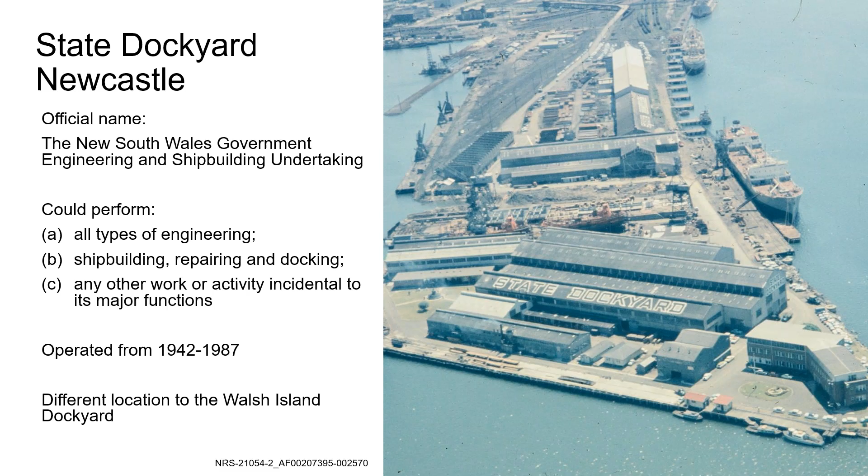As mentioned, the State Dockyard commenced operation in 1942 in the middle of World War II. Britain at that time was heavily reliant on shipping to provide supplies and men. But as the Battle of the Atlantic progressed, German U-boats inflicted heavy losses on British ships. And in 1940, Winston Churchill sent out a call across the seas for ships, more ships, and many more ships.

As a result, William McKell, who was the New South Wales opposition leader at that time, had started pushing for the reopening of a New South Wales dockyard. Upon his election as Premier in May 1941, he approached the Australian Shipbuilding Board for the go-ahead, which was provisionally granted. So on the 25th of August 1941, Mr. David Lyon McClarty was appointed State Director of Engineering and Shipbuilding. He had a strong background in shipbuilding, having worked at privately owned shipyards in both Scotland and Australia for many years, and he reported directly to the Minister for Public Works.

McClarty's first job was to re-establish a dockyard as quickly as possible, and there were thoughts of resurrecting the former Walsh Island dockyard. However, an assessment of the site was disappointing. Much of the equipment and plant had been sold off when it closed in 1933, and the site was a scene of desolation. Additionally, access to the island required constant dredging due to silt build-up in the Newcastle harbour.

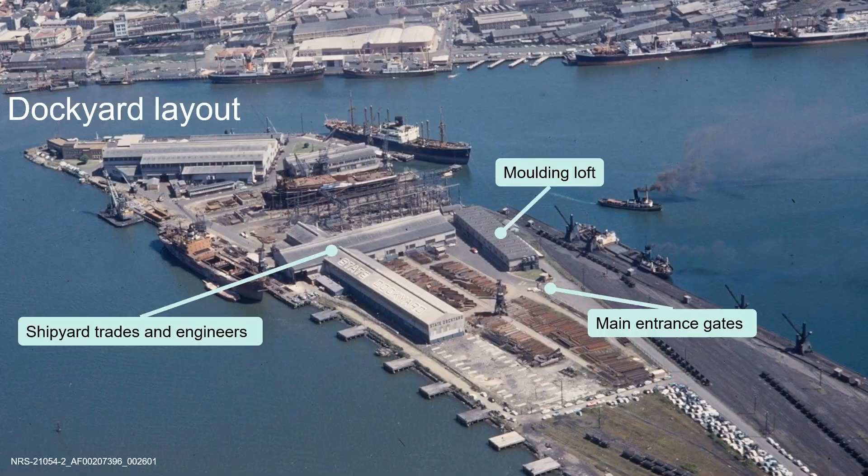At the end of the peninsula were more workshops, and the larger building with State Dockyard written on the roof comprised the blacksmith shop, the machine shop, boiler shop, electrician shop, repair shop, and a garage and plant maintenance section. The smaller buildings to the foreground housed the joiner's shop and the pattern shop. And to the bottom right of the picture is the two-story admin building where management and office-based staff were located.

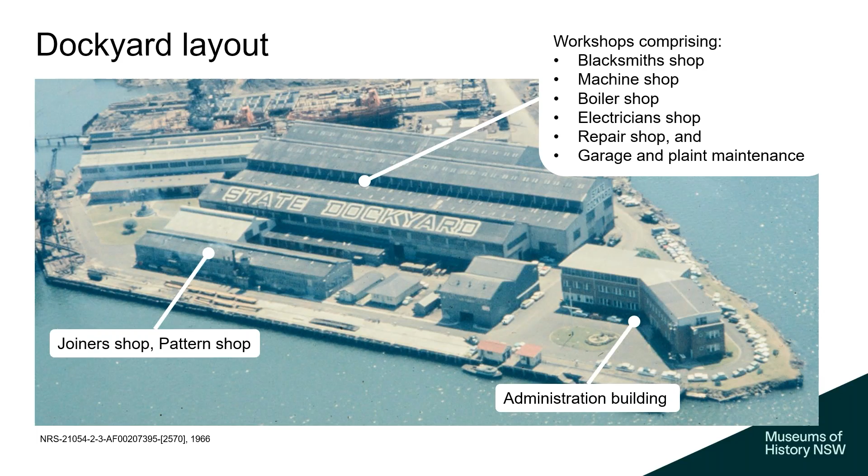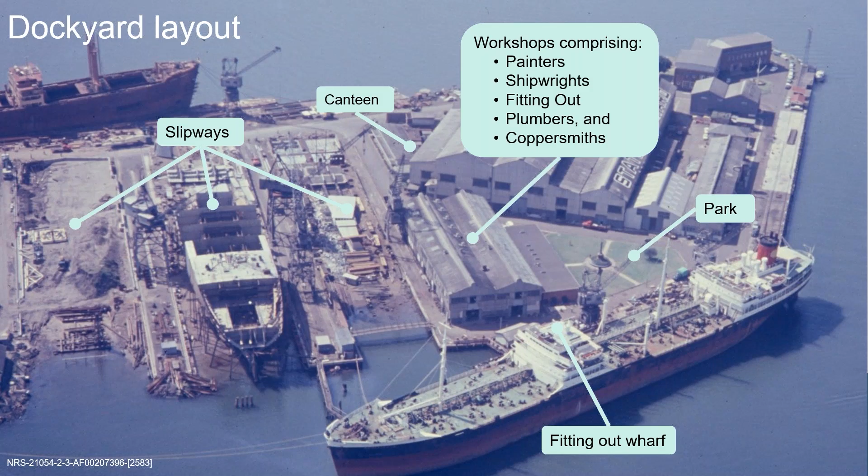And it must have been a momentous task to prepare and serve all those meals, but it was essential for the men to keep their energy up, because shipbuilding involved a lot of manual labour, and it wasn't as though they could just pop down to the local Macca's for lunch.

So another key part of the dockyard was the floating dock, and this was essential for the docking and repairing of vessels. As mentioned, the floating dock came from the former Walsh Island dockyard. There it had operated in 2 separate sections, but for the new dockyard, the 2 sections were joined together to create a floating dock with a lifting capacity of 15,000 tonnes. And this meant it could accommodate a lot of the larger vessels.

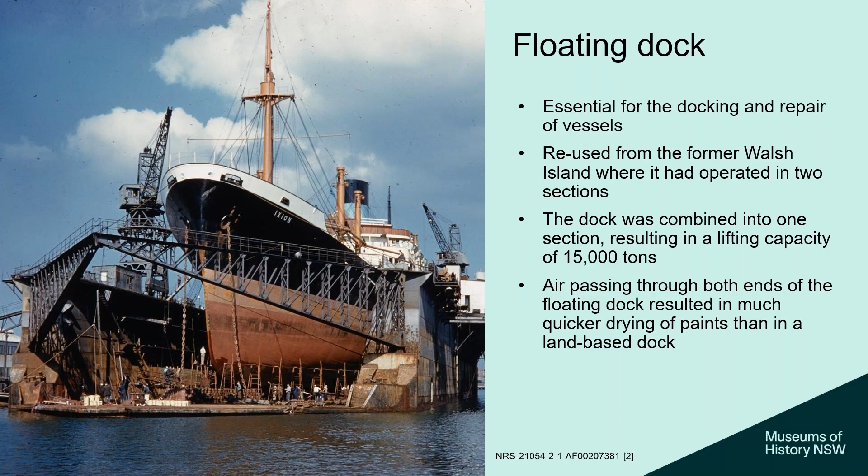So a few months later, in October 1942, the Australian Shipbuilding Board placed orders on behalf of the Small Craft Construction Directorate for 20 more vessels. These were 120-foot twin screw cargo vessels to be built on a production line basis. Formal approval for the dockyard was not given by the Commonwealth Government until January 1943, but by then the dockyard's operations were well underway. By the end of the war, after just 4 years of operation, 21 vessels had been constructed for the Army and Navy.

6 sets of triple expansion engines were completed, and 600 vessels had been docked and or repaired, and many of these had been heavily damaged by enemy action or collision. And great reviews were received about the quality of the work at the dockyard.

In a 1944 letter from Charles Brown, who was from the United States War Shipping Administration, he said that during the past few months, several US warshipping admin vessels have been dry docked and received major repairs, and the facilities at Newcastle have been of incalculable benefit in putting our ships back into service for the war effort with minimum delay. And in another letter from Captain Rabone of the SS Admiral Chase, he said, 'It was the best work I have seen in 5 years. The docking was done expeditiously and efficiently.'

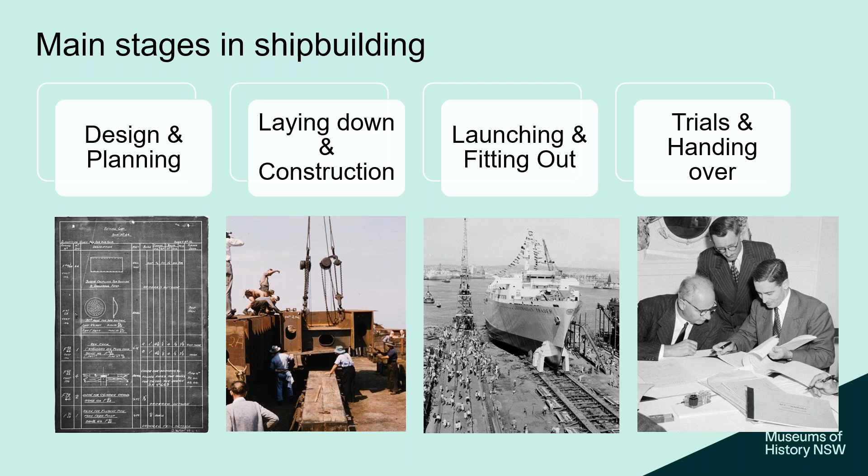As a first step, plans and drawings of the vessel were prepared. These plans would include the arrangement of the vessel, including cargo, fuel and ballast, and crew and passenger accommodation, accompanied by detailed specifications of the hull and machinery. In some instances, such as with Army and Navy vessels, plans were already available based on pre-existing templates.

Once the plans had been prepared, engineers at the dockyard then drew detailed plans for use by the yard's builders and to construct detailed production schedules. We do hold original plans and specifications for many of the ships constructed by the dockyard. However, as the plans can be quite large and many have been stored folded and rolled, a conservation assessment may be required before they can be issued in the reading room. The National Archives of Australia may hold plans for any naval or army vessels constructed by the dockyard.

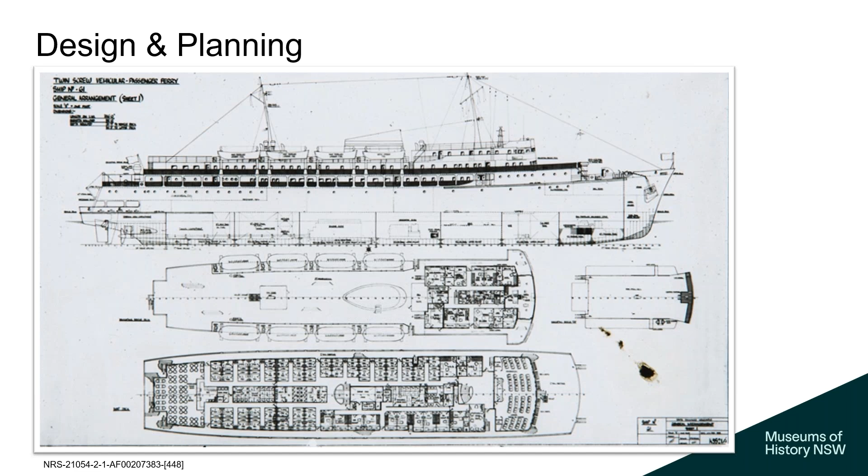Earlier I mentioned the moulding loft that was in the building just to the right of the main entrance gates. The moulding loft played a very important role in the construction of the ship. It took up the whole top floor of the building and was a big open space. In this area, the ship's design was transferred in full scale onto the lofting floor by loftsmen, and from these drawings full-sized wooden molds and templates were made, which served as guides for cutting and shaping the steel or wooden parts for the ship.

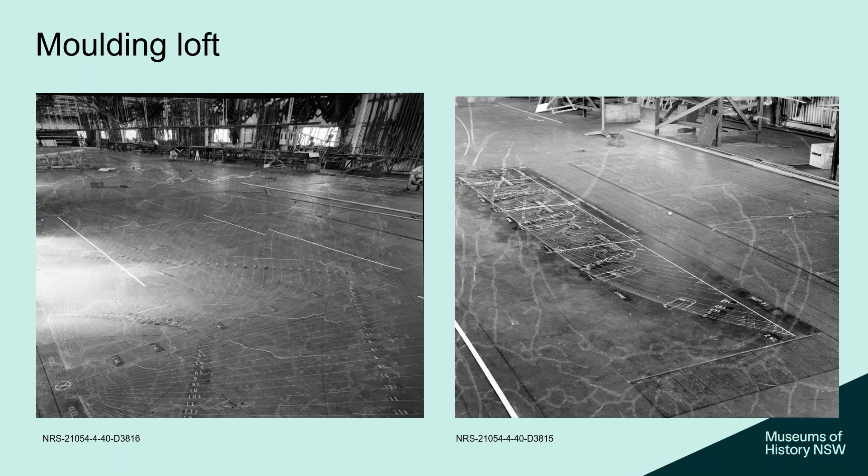The next key stage was the laying down, when the first section of keel was laid on the building blocks. This step signified the official start of the construction process, even though fabrication of some parts may have begun earlier. Here we see the keel of the Princess of Tasmania being laid down on the 15th of November 1957, and everyone looks pretty excited to get that first bit of keel in position.

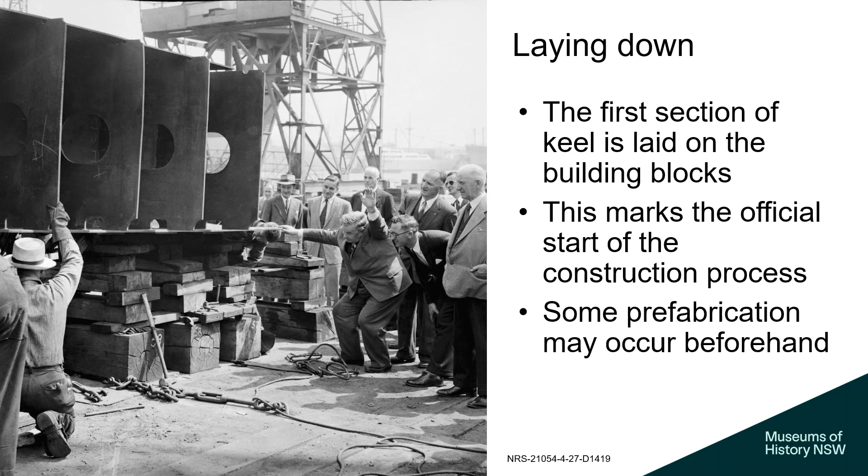Once the keel was laid, construction would progress section by section, with various parts of the vessel constructed either on site in the workshops or in some cases sourced externally. It could take months or years for a vessel to be completed, especially if waiting on parts from external suppliers, and sometimes industrial action did delay the process. But what amazes me most is the immense proportions of these components. Each had to be lifted, maneuvered into position, and then riveted into place.

On the left here we see a workman standing beside the bulkhead of the Koojarra, ship number 59, a passenger cargo ship built between 1954 and 1956 for the West Australian government. On the right we see the stern of the BP Enterprise, ship number 77, constructed for the BP Tanker Co. between 1967 and 1968. Some really massive structures here that absolutely dwarf the workman.

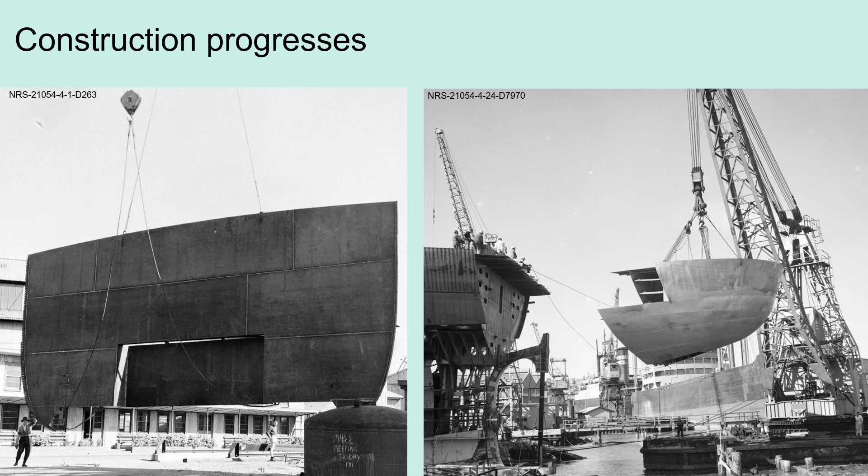Once the hull was completed and watertight, the next stage was the launch. The launch did not mean the ship was ready to sail away, but it was another significant moment in the construction of a ship - a culmination of everyone's hard work over months and years, and there was no greater satisfaction than watching a newly completed vessel sliding into the water.

In 1988, a researcher named Natalie Sanderson interviewed former dockyard employee Frank Neat for a history project. When asked what he enjoyed most about his 40 years at the dockyard, Frank said it was the launch of every ship. Here we can see the Australian Trader, ship number 79, being launched on the 17th of February 1969. The Australian Trader was a passenger and cargo ship built for the Commonwealth of Australia. It had taken 18 months from laying down to launch, so it must have been a big relief for everyone to see it go down the slipway. It was estimated that 1,500 people came to watch the launch on the day.

And you can see employees here in the photo on the rooftops and scaffolding, and there are many people streaming into the slipway to watch the event.

Launching a ship was not a simple process. The launch program involved many steps and checkpoints, both prior to the launch and on the day itself, to ensure that the launch went smoothly. Dockyard employees had to prepare the ship prior to the day, for example by oiling the slipway. And on the day of the launch, select employees would arrive early in the morning to prepare the vessel. One forgotten step could ruin the launch.

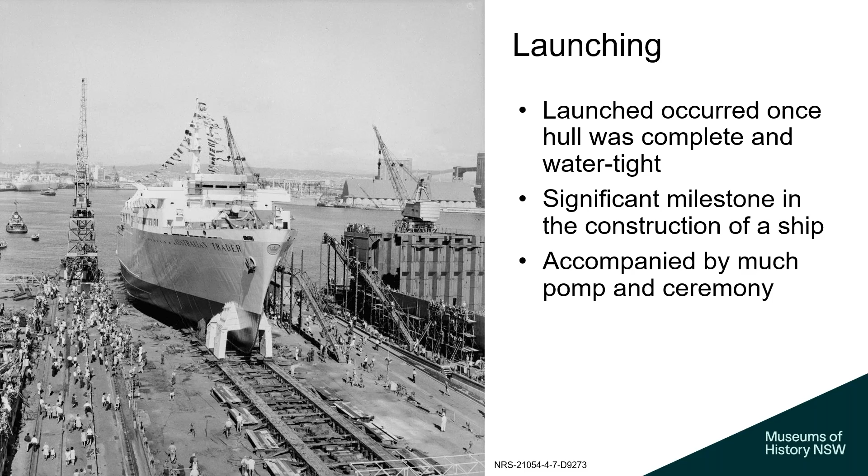Each launch was a big event with much fanfare. Key dignitaries and officials were invited, including relevant government ministers, the local mayor, and the ship's owners. A ship's sponsor was chosen, and most often this was the wife of the minister or another important guest. Dockyard employees, their families, and the local community were also welcome to attend, and the vessel would be decorated with bunting. A flower girl would be selected to present the sponsor with flowers, and the ship would be christened by smashing a specially designed champagne bottle against the hull of the ship. Invited guests would then attend a catered luncheon after the launch, and the sponsor would also receive a gift.

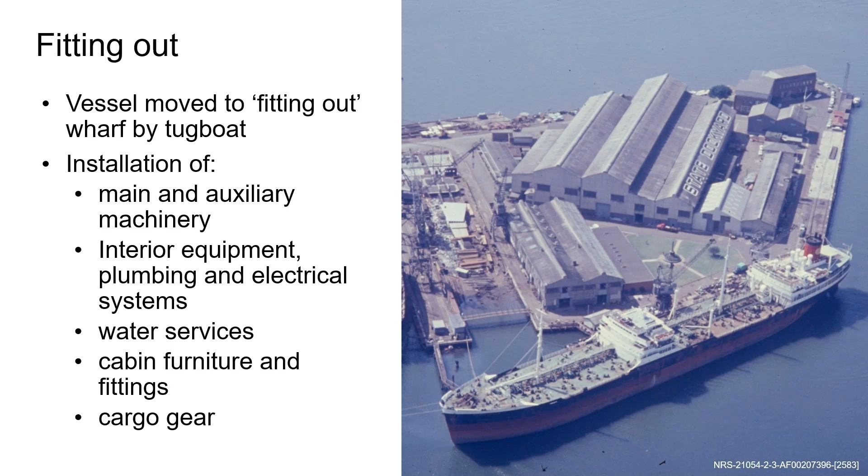Colour schemes would be chosen for items such as the bulkheads, deckheads, floor coverings, and upholstery. For example, the interior of the Bass Trader, ship number 64, was painted in colours such as pastel green fantasy, squirrel walnut, and ballerina white fantasy. The deckheads or ceilings were finished with white formica. The upholstery on the ship was in colours such as Norfolk grey, red 21 antique, or olive green.

Now, after fitting out, extensive sea trials would take place, and this was to ensure the vessel met performance and safety standards. The trials would be conducted over several days and could include full power trials, steering and circle trials, as well as tests of navigation and other equipment. The results of each test would be fully documented, and any issues would need to be addressed before delivery of the vessel to the new owners.

On the left, we can see the BP Endeavour, ship number 76, undergoing its sea trials. It was an oil tanker built for the BP Tanker Co. Limited. And in the image on the right, we have personnel recording the results for sea trials on the Darwin Trader, ship number 82, which was built for the Commonwealth of Australia.

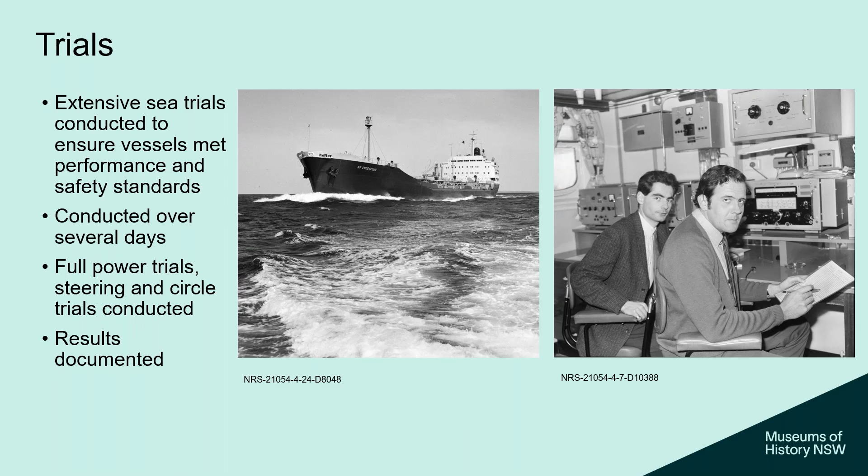So as an example of the whole process from start to finish, let's look at the Bass Trader. This was a vehicle deck cargo vessel built for the Commonwealth of Australia. It was laid down on the 14th of September 1959. It was launched on the 3rd of December 1960 and handed over on the 4th of April 1961.

But delays in the arrival of the engines and some windows from the United Kingdom extended the production schedule. Once the engines arrived, the coppersmiths worked overtime every night during the week and on Saturdays and Sundays, getting the main engines ready for turning so that 4 days of sea trials could take place.

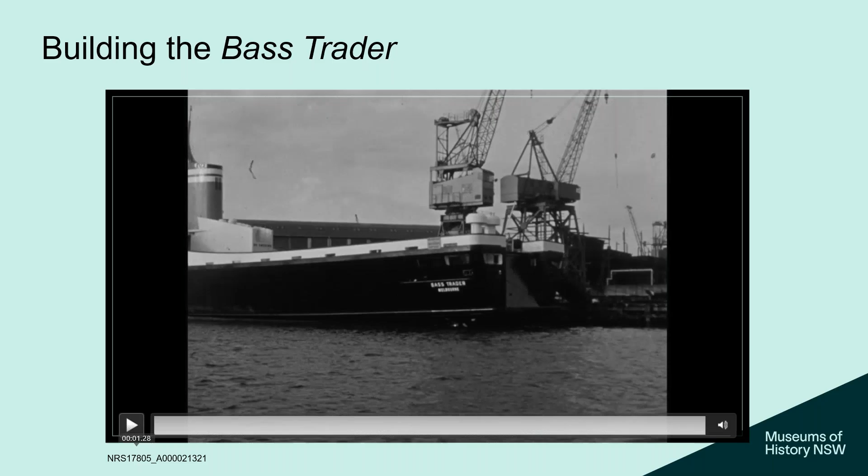So the Bass Trader was significant because it was the first of its type in the world. It was the first roll-on, roll-off cargo ship, which could take trucks and other large vehicles. It had a capacity of 60 semi-trailers on the main deck and 22 containers on the upper deck.

And it was the only merchant ship propelled by a Napier Deltic diesel engine, which was a much more compact design. Provision was made to carry a spare engine on the vehicle deck of the vessel. And it subsequently made maritime history when it became the first ship ever to change an engine while at sea.

And here she is in the floating dock during March 1961, looking beautiful under the lights. Maybe this is one of the nights that the coppersmiths were working there overtime.

Oh, and by the way, there were 2 vessels by the name of Bass Trader built by the dockyard, both for the Commonwealth, but the later vessel was ship number 94, and it was built between 1974 and 1976.

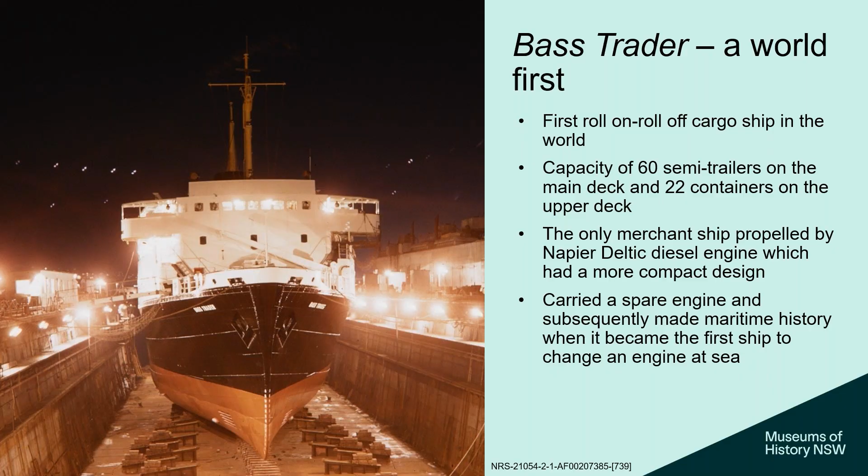So as you can see, there was so much work and so many people involved in constructing a ship. Now, unfortunately, employee records from the dockyard have not been transferred into the State Archives collection at this time, but we do have plenty of photos of dockyard personnel. And while there were a handful of women working in admin and food service roles, the majority of the employees were male.

So please enjoy this selection of photos of the men of the dockyard. You can see examples of the many different trades and occupations at the dockyard.

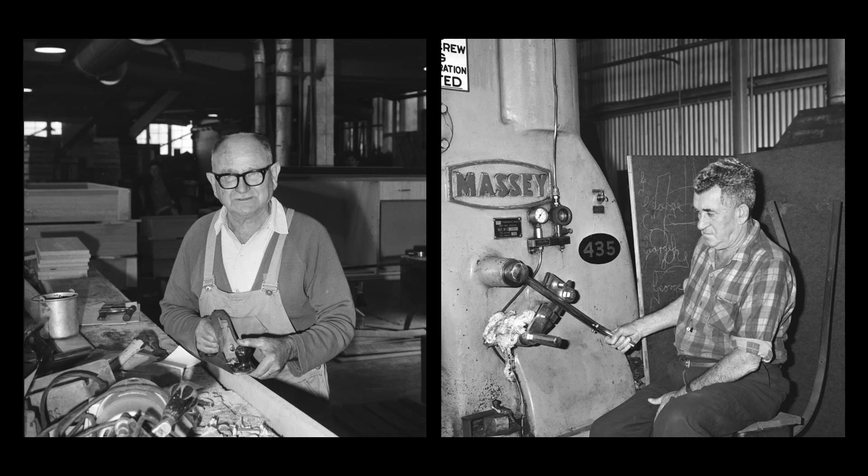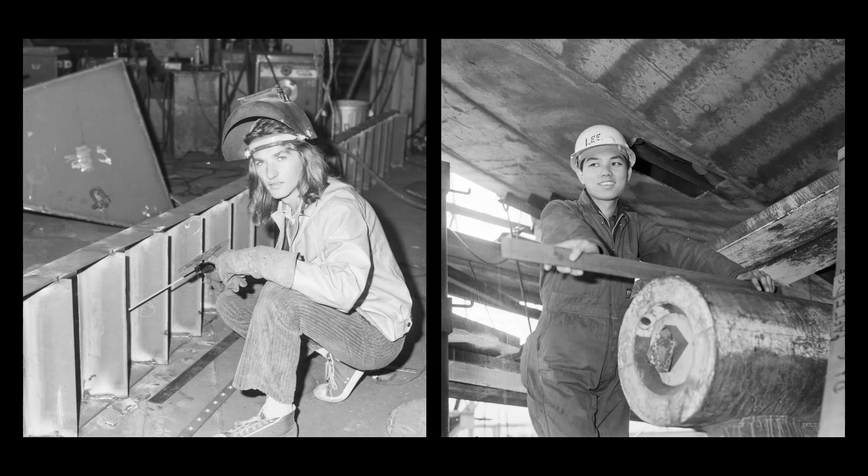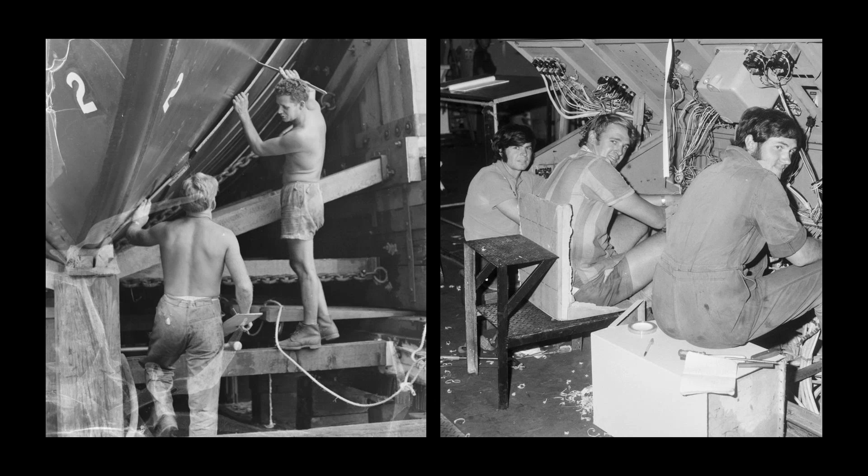Some were blue collar, some were white collar. Some wore overalls, and some wore casual clothes or aprons, and some wore no shirts at all. Some were based in workshops, and some were in the offices, and others spent more time on the vessels. But they all came together to get the job done.

So aren't they great images? And you can find even more in our catalogue, and I'll tell you how at the end of the webinar.

So now briefly, I want to touch on the broader work of the dockyard, because it didn't just build ships, it could carry out any type of engineering. Some of the general engineering works the dockyard completed included components for dams, such as this huge spiral casing for the Hume Dam. The dockyard also constructed items for several power stations, steelwork for the Hexham and Bateman's Bay bridges, as well as demountable buildings for schools and offices.

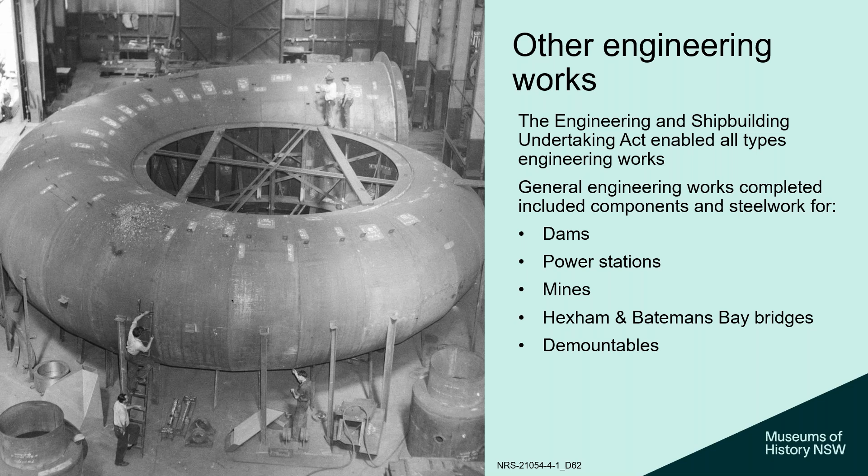On the left, we have a cascade mill, which was produced for the Cobar copper mines, and this was used for grinding ore. And on the right, we have the third section of a condenser bound for the Vales Point power station on the New South Wales Central Coast. This condenser was so big that it had to be constructed and moved in four separate parts.

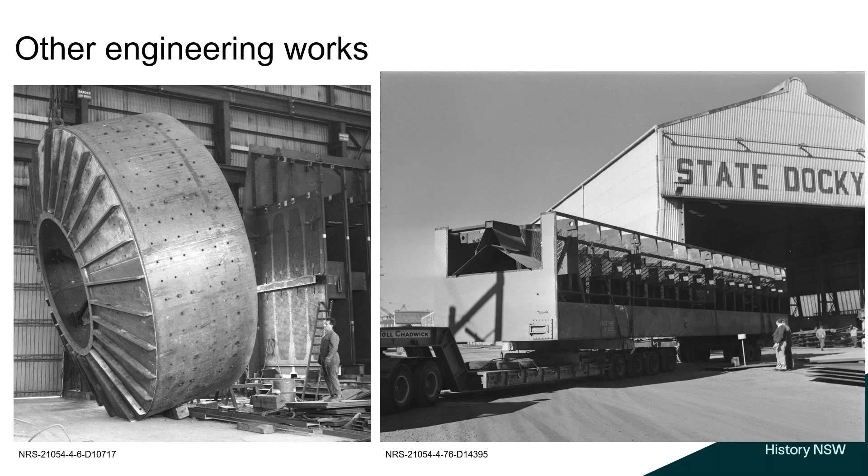But the 1970s saw a downward trend in shipbuilding. In 1976, employee numbers at the dockyard were reduced from over 2,200 to 1,100, particularly in the shipwright trades. So the last two big ships constructed by the dockyard were the Flinders Range, ship number 95, and the Selwyn Range, ship number 96. These were both bulk ships constructed for the Commonwealth's Australian National Line.

No further orders for large vessels were forthcoming after this time, and a government review in 1977 blamed rising costs, stiff competition from international dockyards, especially those in Korea and Japan, and ongoing industrial action at the dockyard that delayed construction schedules. The employees, on the other hand, blamed the politicians and poor management.

After 1978, the dockyard was reduced to constructing smaller vessels, such as barges and ferries, and non-ship related engineering. In 1983, the dockyard handed over its last vessel, the ferry Queenscliff.

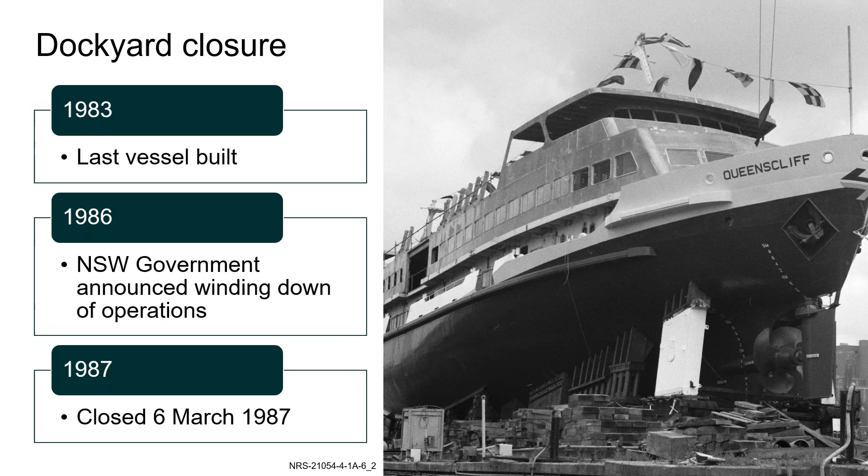So during its 45 years of operation, the dockyard had played a vital role in Australia's defence and merchant shipping capacity. It had become an integral part of Newcastle's identity as a working class maritime industrial city. It provided thousands of jobs and supported the local economy, and it had trained generations of engineers, tradespeople, and naval architects.

Well, I hope you've enjoyed this presentation. As you can see, we have a wonderful collection of photos from the dockyard. Over 20,000 images from this series have now been digitised and published in our catalogue.

And you can then sort the results in date order using the date filter on the right-hand side of the page. On your results page, you can click through on any item to view the image and download it for free.

But please note that many of the negatives in this series have suffered irreversible damage due to vinegar syndrome, which particularly affects acetate negatives. So in some cases, you may just see a marbling effect across the image, but unfortunately, there are also many images where the damage was very advanced and part of the image has been lost. Digitisation of this series was prioritised due to the risk of further loss to the negatives.

So for other records of the dockyard held by us, you can search for agency number AGY-2990 and then look at all the different series that we hold and the date ranges they cover. We also hold apprenticeship registers from the Department of Industrial Relations that list about 300 young men apprenticed to the dockyard during the 1940s and 1950s. And you can go to subjects A to Z, then apprentices to search that index.